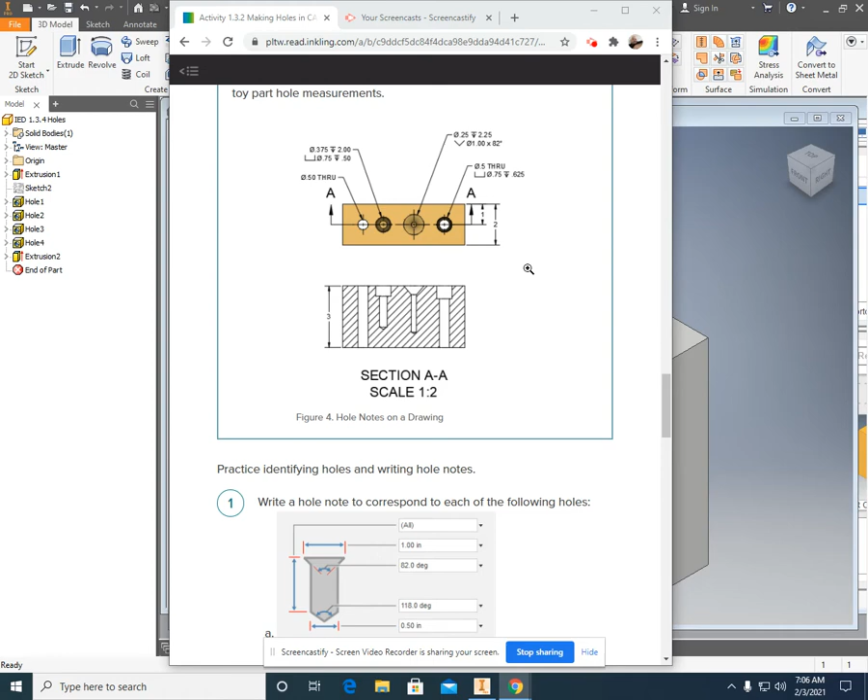Haha, whole. We're going to be working our way towards actually making these holes. Now, I know you might be thinking, working our way, that's redonkulous. They're just holes. I should be able to do this. But before we get there, making this right here, we've got a variety of things that I want to show you and talk to you about. The first off is how to actually make these holes. Otherwise, you're going to be very frustrated.

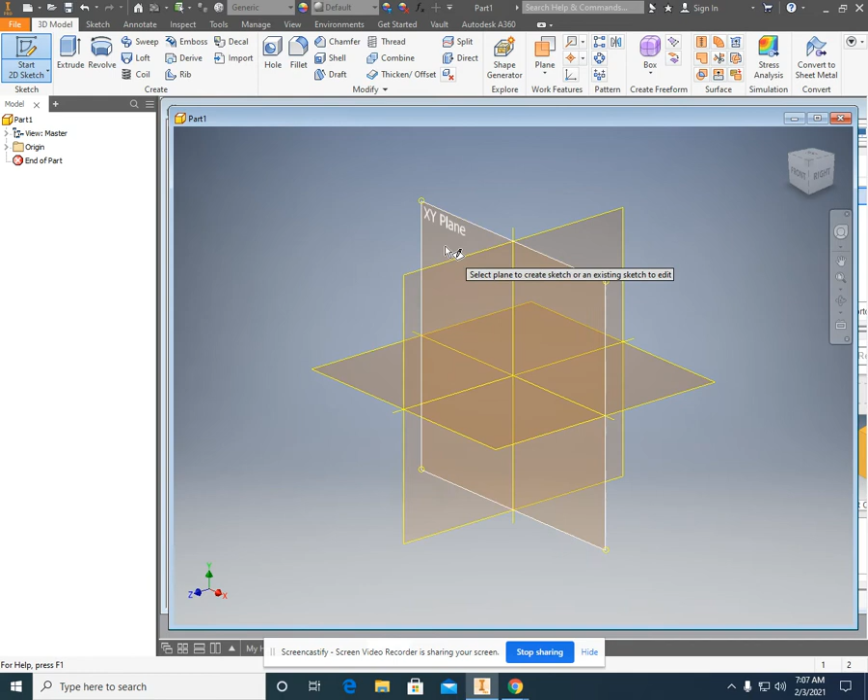So I am going to minimize this right here. And please work along with me, we're going to make some scrap parts in this first video, just so you can learn some of the tools. So File, then New, then Part. Start a 2D sketch, choose the XY plane, and now I am just going to draw a rectangle.

So I clicked on the rectangle, go to the origin, and doesn't matter what size it is, just drag and drop upper right, click on Finish Sketch, then go ahead and extrude it. Does not matter any size or anything, just as long as you have a basic block right here in order to work with. So we've got a few things that I want to show you today.

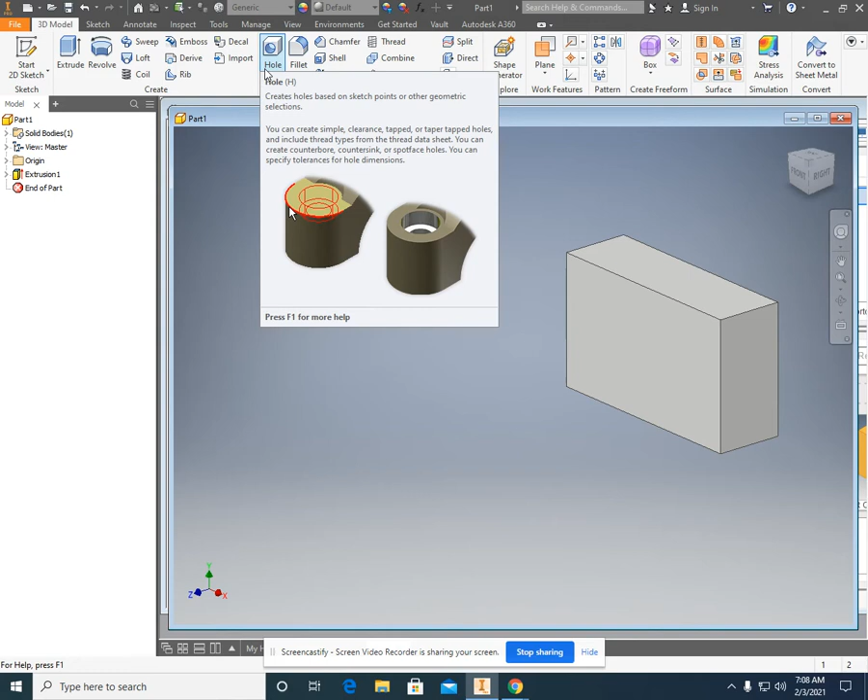The first off is putting in what are called points, because a hole is different than a circle. We have a hole tool up here. You might be used to drawing circles as holes, but circles and holes are completely and totally different. So start a 2D sketch right here. Okay, so I click 2D sketch, and I clicked on the face of that object.

Now, right here, you're going to see a tool that says Point. Click on Point, and go ahead and put a point right there. You might have difficulty seeing it. It's just a small green cross. Right-click, and OK, and we have a point right there. So you can put the points wherever you want. When you're actually working on this project, there's going to be different dimensions where we put the points, but every hole starts with a point.

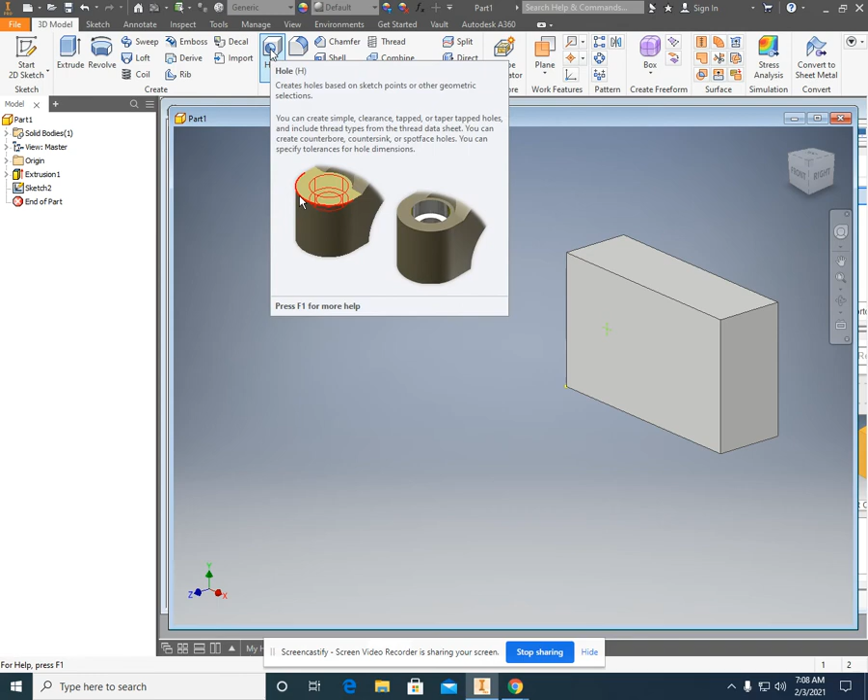When you're done with that, go ahead and click Finish Sketch right there. You can still see the point is right there. Once the sketch is finished, we can then go ahead and click the Hole tool. Now, when we click the Hole tool, you can see that it automatically defaults to specific holes. So let's talk about this pop-up window right here, because this is where everyone gets frustrated. You're used to doing work all willy-nilly, but now we have to be more specific.

So first off, let's talk about termination. This tells you the distance right here. So this, you can see, is a through hole. You can see that in this right here. We can change the diameter. Let's say it's 0.5. So the hole got bigger. 0.75 is even bigger. 1 is even bigger. But you can see in the ghost image right here that it's going all the way through.

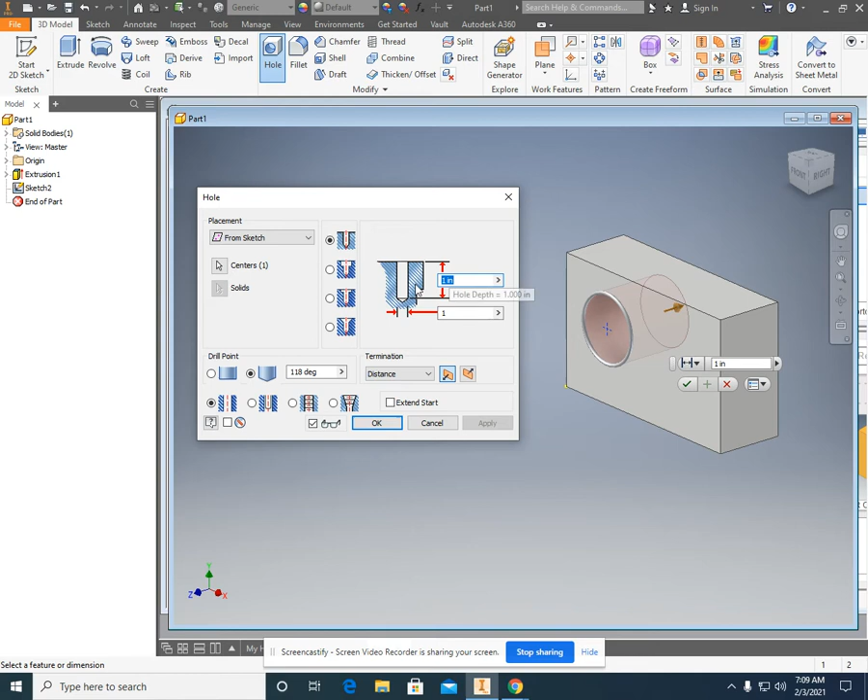Now let's say we go to distance right here. Distance will allow us, if you see this measurement, to set how far the hole actually goes in. So let's keep it this 1-inch diameter, okay? Now watch, I'm going to change the distance to 0.25. And you can see that that hole now does not go all the way through. If I change the distance to 0.125, you can see it closes up even more. So this is the through hole tool.

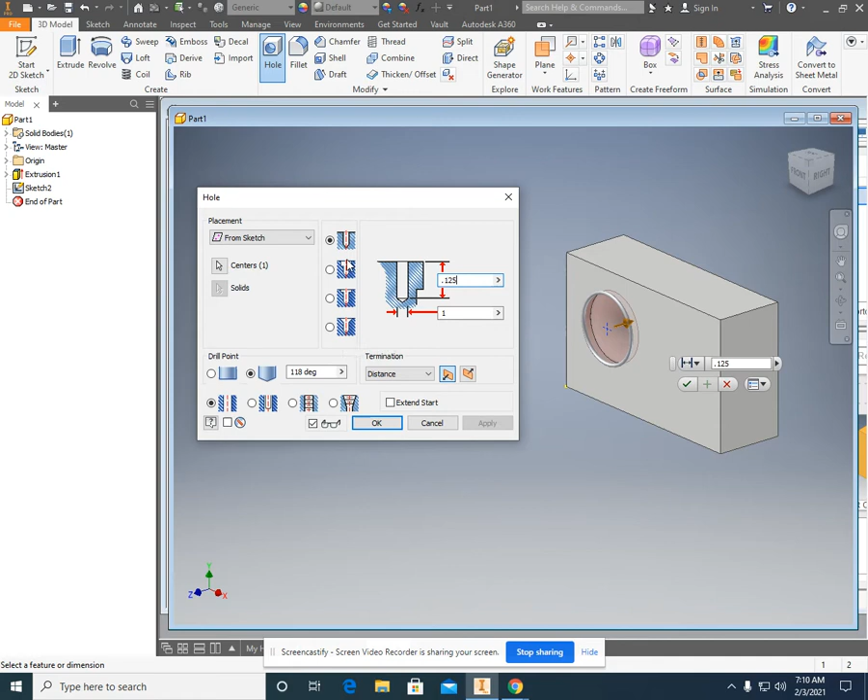Now, if you remember from our hole lesson the other day, we also have countersinks, spot face, which we didn't talk about, it's more professional engineering, and counter bore. So we're going to stick with countersink and counter bore. So let me go ahead and change the diameter to 0.25. Okay, so it's a small hole, and I'm going to go back to through right there. So this is where we started.

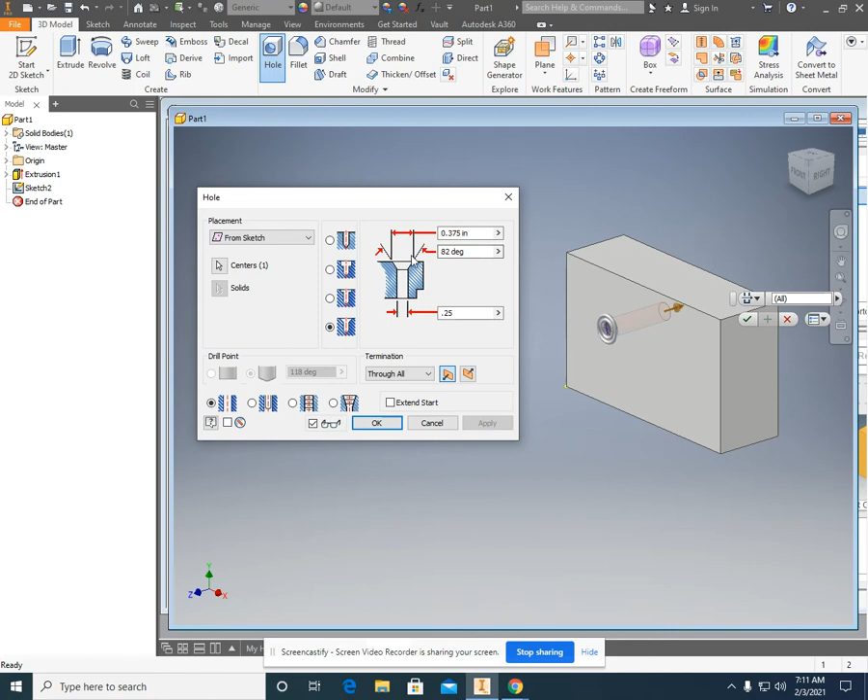Now, if I want to do a countersink, so you see countersinks in furniture installation or automobiles, I can click countersink, and you can see the geometry right here has changed dramatically. We still have a through hole. It goes all the way through right there, but I can change the opening to, say, 0.5. And you can see that right over here, the opening opened up. I can go to 1 inch, where the opening is much larger.

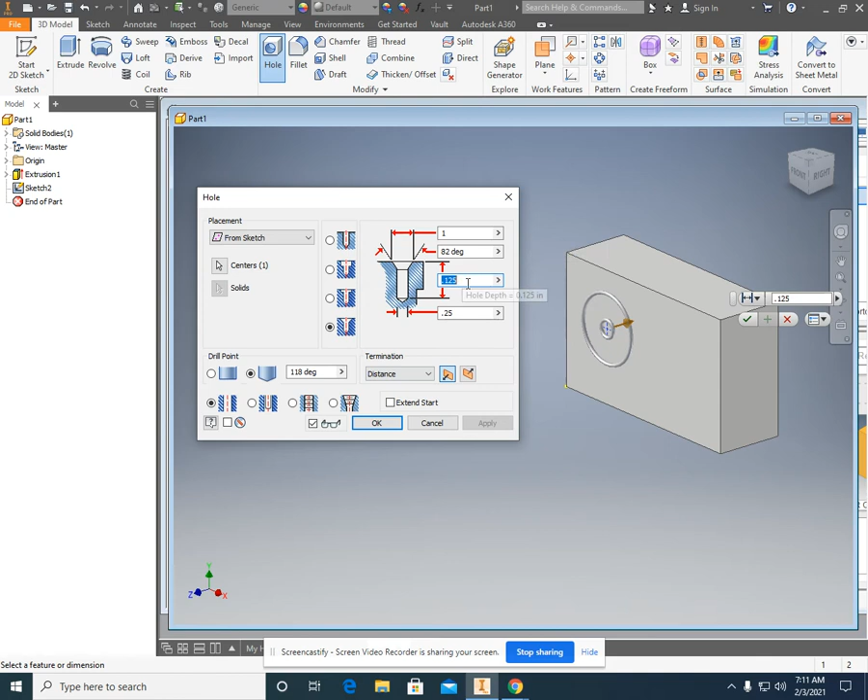I can change the degree right here of the fastener based on the screw or the bolt that I'm going to be inserting. I can also do distance right here, which let's say I want 1 inch distance right there, 0.25 in diameter right there. It's a 1 inch opening. Now I'll click OK, and if I rotate this, you can see that I've got a large countersunk opening, and I've got the 0.25 diameter hole.

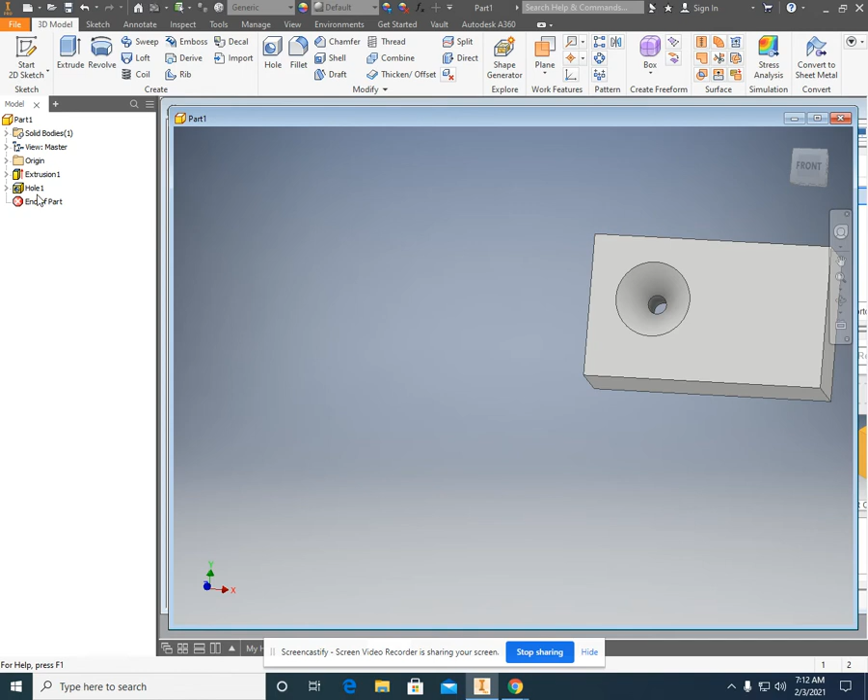Now here's where we get some fun going on. Let's say you completely mess this up. This menu right here, I can right-click on the hole, put Edit Feature, and it comes right back up. So let me show you that again. This hole right here, I can go ahead, rotate it. Oh no, it's wrong. I did something wrong. Instead of trying to delete it or back arrow, I can hover over the hole right over here, right click, edit feature, and now I'm right back to the editing menu.

Let's say I was supposed to do a counter bore rather than a countersink. So I can go ahead, hover right over the counter bore, and let's see.

Yeah, that's the spot face. There's the counterbore, and I can go ahead and change the counterbore. So the difference between the countersink, you see these angled portions, and the counterbore is the square portions. I can change the opening up here. Remember, look for the arrows. So my counterbore is 0.5, let's say.

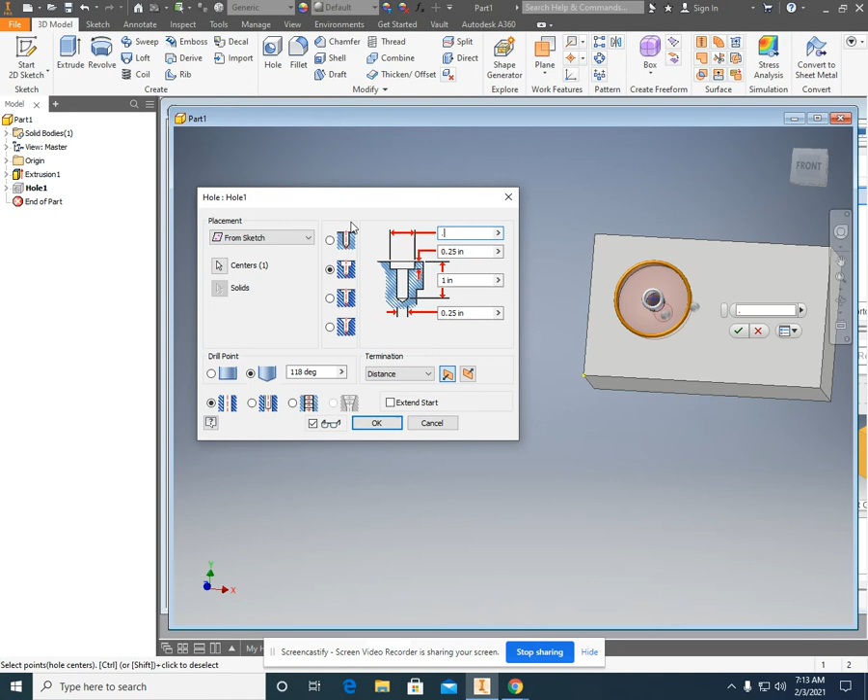How deep does the counterbore go? Let's say it's 1/8 of an inch, or 0.125. What's the distance from the top of the material or the top of the bore to the bottom? Let's say it's 0.5. And what's the diameter? Let's say it's 0.125. So I can change absolutely all these sizes all the time.

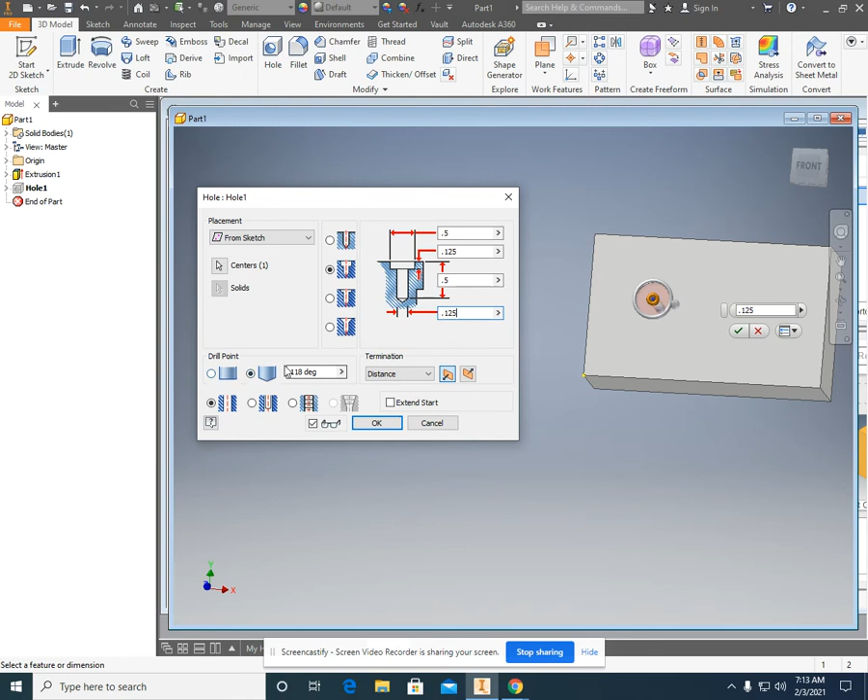Now, a fun, interesting thing is the drill point. Picture this as actually being a manufactured object. Do we use a flat drill point, or do we use a drill point which is angled right there, and we can change the angle? You really won't be doing that this much in this particular class, but it does exist. Okay, so let's see what we got right there, and there is our hole, just like that.

Okay, now let's say I am very angry at this particular hole. It didn't work out, and I'm like, curse you, hole, curse you.

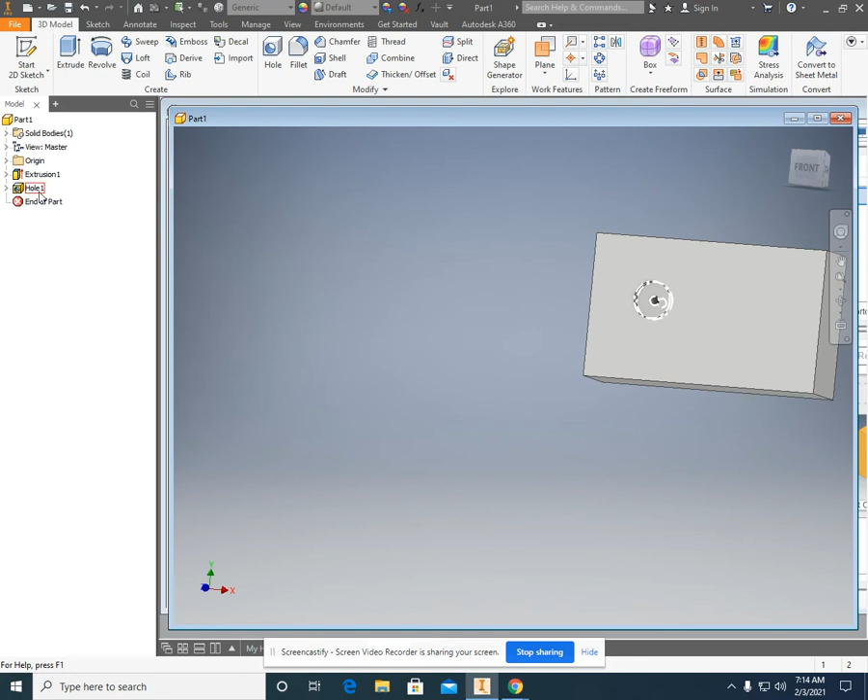Why? I can actually go ahead and delete the entire thing. Go over to this menu, right-click, delete. And then it'll ask me to delete consumed sketches and features. That's talking about the point in the middle. Does it want me to delete the point as well? So I'll click OK, and it's all gone again.

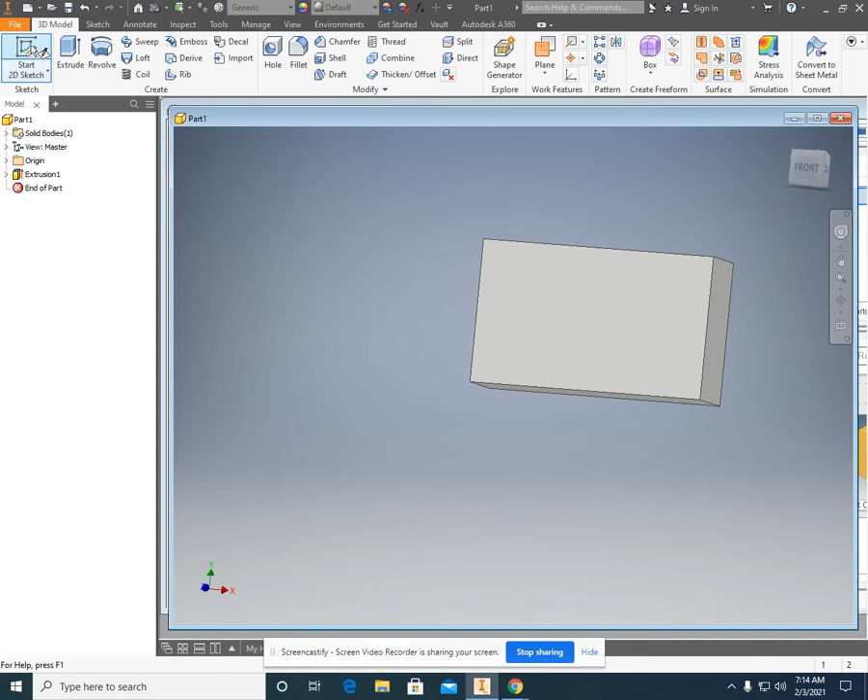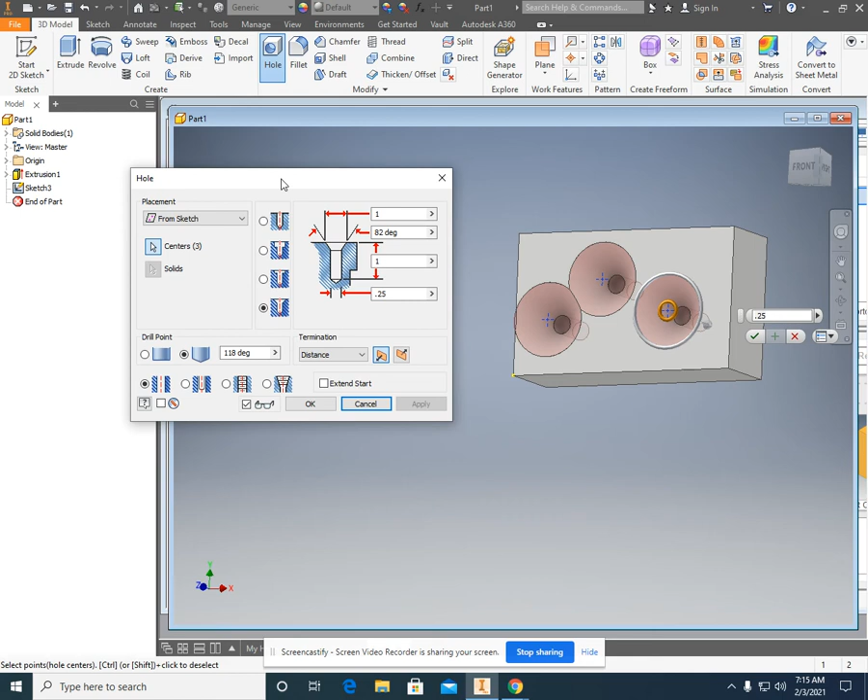Now let's say you have to put in multiple holes. So start 2D sketch right here. Choose the face of the object. Use the point. And I'm going to put 3 different points right there. Okay, so you can see I've got 3 different points: point there, point there, point there. Finish sketch just like we did before. And I'm going to click the hole tool, and it automatically goes to default and everything on the last hole that I used. So let's go back to what we had originally, the through hole.

Just right there, okay? Now, this is where you run into a problem, and you're going to go, teacher, what do I do? I don't want you to do that, because in most of these projects that we're working on, you're going to have multiple hole diameters. So ready? To deselect these holes, please listen. Deselect the holes. On my keyboard, I'm going to hit the control key. So you cannot see that right now. I am hitting the control key, and I am going to click here. Oops.

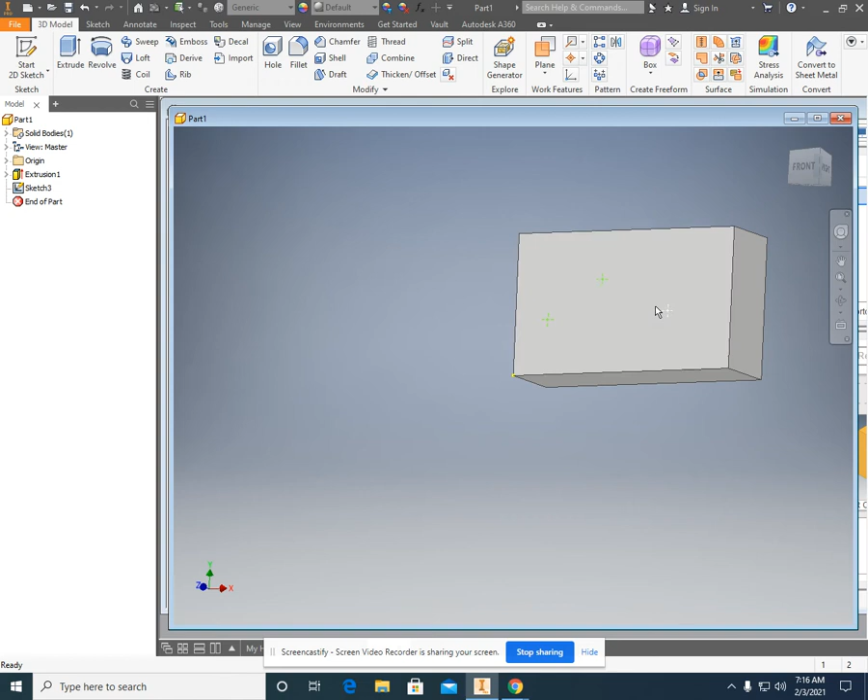Try this one again. Hole, click, click. Okay, so again, if you didn't see, we have all the points right here. Click the hole tool. I am clicking the control key on my keyboard. Click the hole I don't want, click the hole I don't want, and I'm left with the hole that I do want right there. So let's say I want to make a through hole 1/4 inch diameter. Click.

Now you're going to go, wait a second, those points disappeared. Oh, woe is me. What do I do now? My life is over. And you're going to want to go, teacher, what do I do? What you want to do, come over to this menu right here. Click that. See, I click this arrow right here, and we can see the sketch. Right-click on the sketch, and I am going to put Share Sketch. Okay, so now you can see those are back.

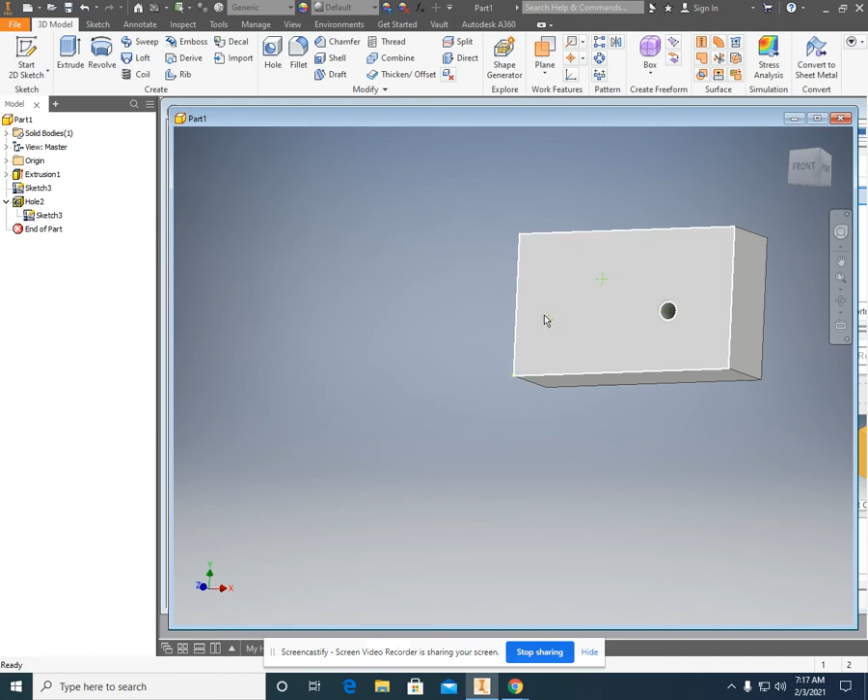Let's look at this again. Let me get unshare. So you get here, and the points are gone. Right-click, Share Sketch, and the points are back. Now we can go ahead and hole. If you don't want the next hole, we can hit the Control key, deselect the hole. Let's say that this one is a counterbore. I'm not going to mess with any of that. Okay, everybody's happy. Hooray, hooray.

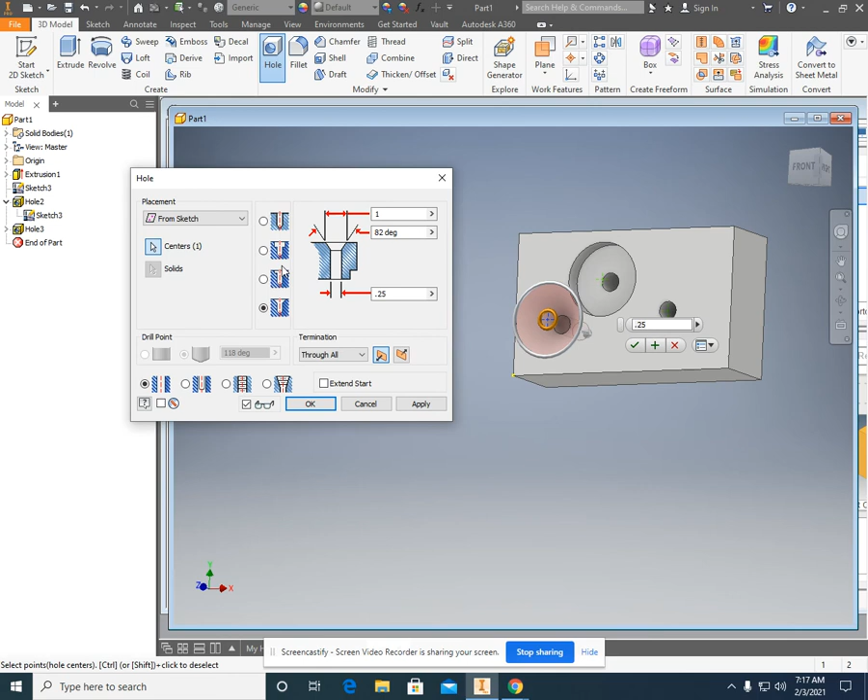I want another hole, and this one is a countersunk. Oops. So hang on, there we go, 0.5. There we go. So now we have a through hole, we have a counterbore hole, and we have a countersunk hole. I know that this is kind of difficult. I know that you're used to just drawing shapes, but if you're going to become an engineer, you have to actually take this stuff seriously and begin to become exact.

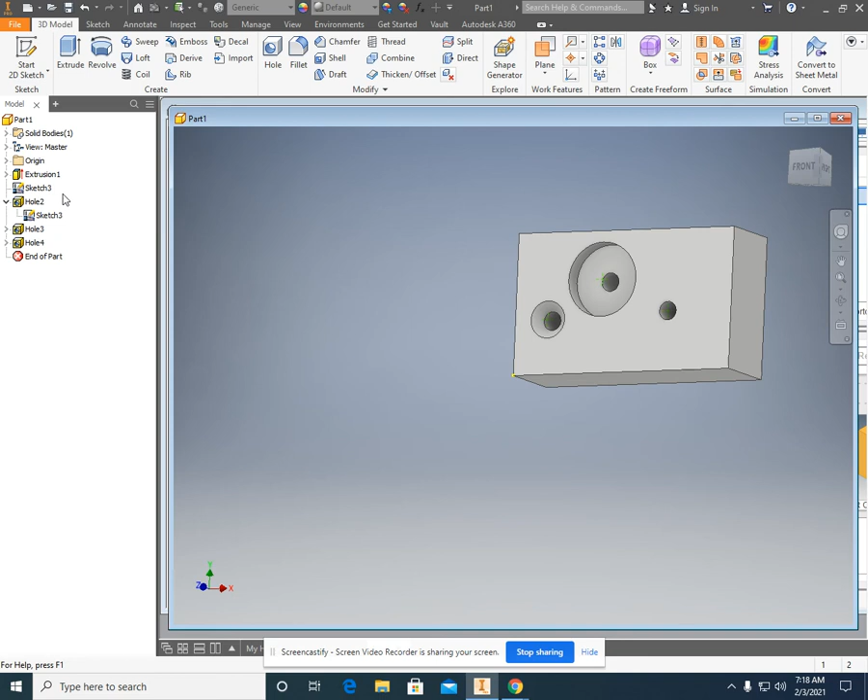Now, the last thing that I want to show you, let's say you don't have this menu, because it's quite common for people to accidentally get this menu off of here. What you do: View, User Interface, and this is all the stuff that you see. So Model, you can see I click Model, that menu goes on and off. If I click on Navigation Bar over here, that's gone. View Cube, so all of these control everything you see. And again, from the Model tab, you go to View, User Interface, and you can control everything you see.

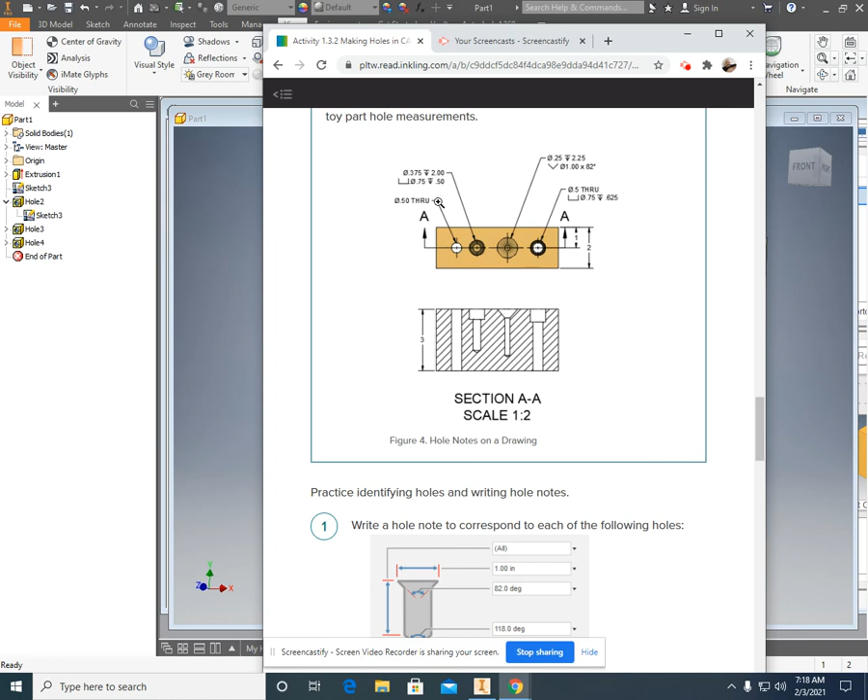So I know that this is a really complicated video. I want you to make this basic sample block. It's going to counteract a whole heck of a lot of problems when you actually start working on the assignment, because we're going to go through and be very exacting with this whole assignment.